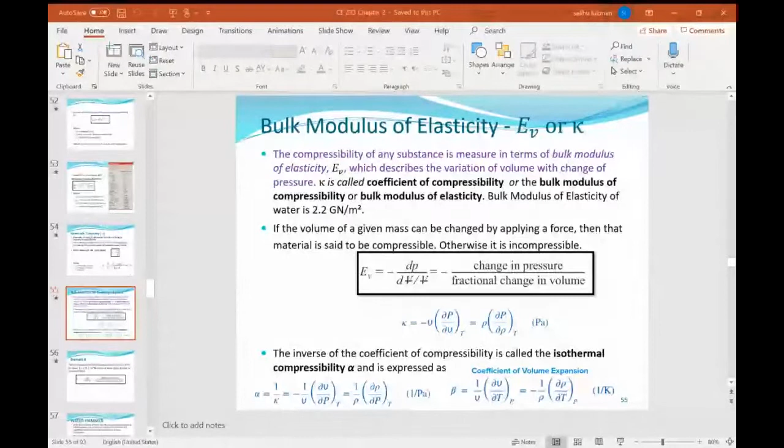We'll stop at... how many questions for the quiz? Not many, maybe just around 2. And it is fill-in. The question is fill-in, which means you are going to solve the problem, then scan and upload on the blackboard. Okay, then we want more minutes, not only 10 minutes. Yeah, that's why it's 15 minutes. So 10 minutes for solving the problem and 5 minutes just to scan and upload back to blackboard.

So altogether it's timed at 15 minutes. I wish you'd increase it because it's the first quiz and this content is fluid mechanics, so we don't know how long it will take. I wish you increase the time. It is going to be simple, the time is enough, just wait and see the question first. Yes, but you know it is the first quiz in this course, fluid mechanics, so we don't know how long it will take from us.

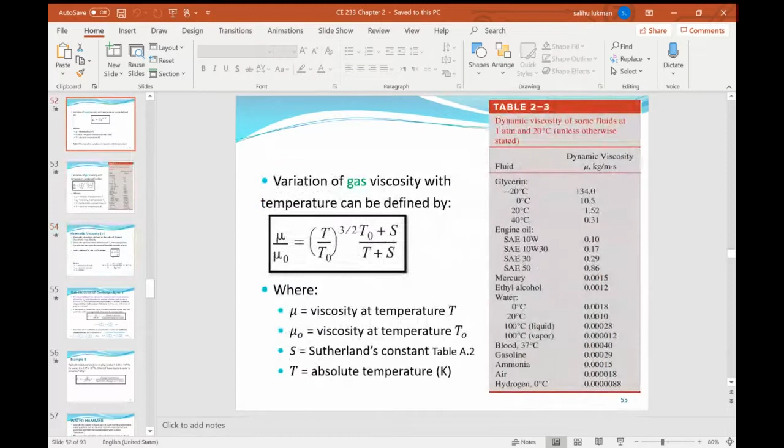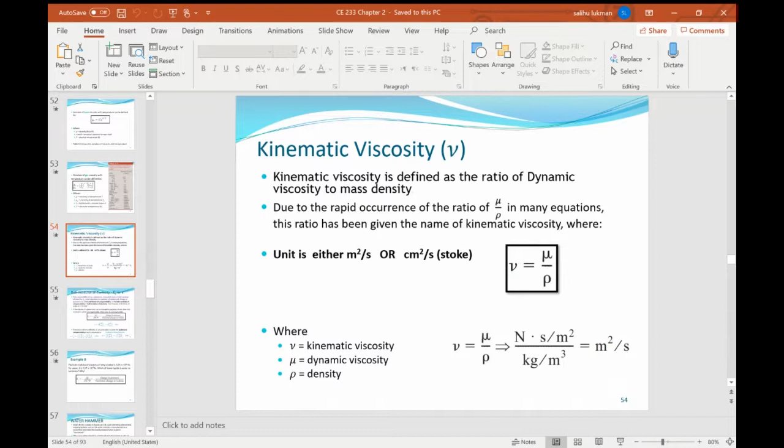So let's continue. If you remember, in our previous class we discussed viscosity, which is the ease with which liquid flows, or the resistance of fluid to shear deformation. This, we said, is synonymous with friction in solids. In liquid or fluid, we call it viscosity.

Now we will look at another property: bulk modulus of elasticity. The symbol for it is E subscript V, or kappa. Kappa, that is not K, but it's called kappa, okay. Which is like a measure of the compressibility of a substance, how easily the substance is compressible.

When we talk about liquids and gases, we have been talking about their compressibility, how the volume can change. The compressibility of any substance is measured in terms of bulk modulus of elasticity, which describes the variation of volume with change of pressure. That is, when you apply pressure, how does it change?

The bulk modulus, kappa, is called coefficient of compressibility, or the bulk modulus of compressibility, or the bulk modulus of elasticity. We have Young's modulus in physics for solids, whereby stress is proportional to strain, stress versus strain, so the coefficient there is Young's modulus. Here we call it bulk modulus of elasticity, because it behaves as if the fluid is elastic, meaning you can pull it.

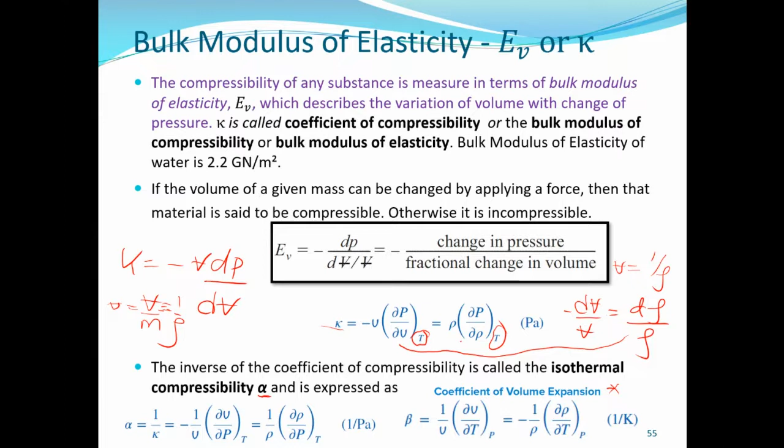So we need to understand all three: the coefficient of compressibility kappa or EV, the compressibility which is the inverse of kappa, and the coefficient of volume expansion or volume expansivity, beta. Alpha is 1 over kappa, meaning for an incompressible fluid, alpha is very small because the change in volume is very small despite the change in pressure. While for an incompressible fluid, kappa is extremely high, since you have dV at the denominator, and the change in volume is very small despite the huge change in pressure that may occur.

Now, just a few examples here to demonstrate the application of the formula. Here you have the bulk modulus. We are to find the bulk modulus of elasticity of ethyl alcohol, provided as 1.06 times 10 to the power of 9 Pascal. For water, it is 2.15 times 10 to the power of 9 Pascal. Which of these fluids is easier to compress, and why?

So who can tell me? You have ethyl alcohol and water. Their bulk modulus of elasticity has been provided. So which of these, based on the bulk modulus of elasticity, is easier to compress? And tell me why. Yes, you can talk, your audio has been enabled. Just talk to me. Just look at the values and tell me, no need to do any calculation here, please.

Okay. Yes. Gentlemen, ya shabab, are you there? We are with you, doctor. Yes, yeah, now tell me. Some are writing, let me check what you are writing.

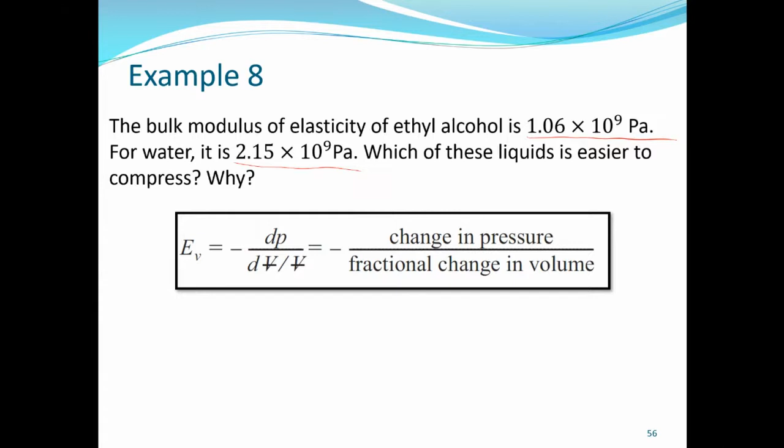We are just talking about pressure, change in pressure, incompressibility of water. We still have in our system where sometimes the density of water could change. We said water is incompressible because its density does not change. But when water flows in a pipe, sometimes due to some sudden change, or when a valve is suddenly closed, water is compressed, locally compressed, such as sudden closing of a valve. So it is locally compressed, and when it is compressed, it means its pressure could drop, could reduce, and when the pressure reduces, it makes huge sounds, and that is called the water hammer, as if hammering the pipe.

That's why it is called water hammer. A hammer is something used to hit a nail or something, so imagine yourself hitting a pipe, gang, gang, gang, it will be making some sound. So small density changes in liquids can still cause interesting phenomena in piping systems, such as water hammer, which is characterized by a sound that resembles a pipe being hammered. This occurs when a liquid piping network encounters an abrupt flow restriction, abrupt meaning sudden, such as a sharp bend, or suddenly closing a valve, and the fluid is locally compressed.

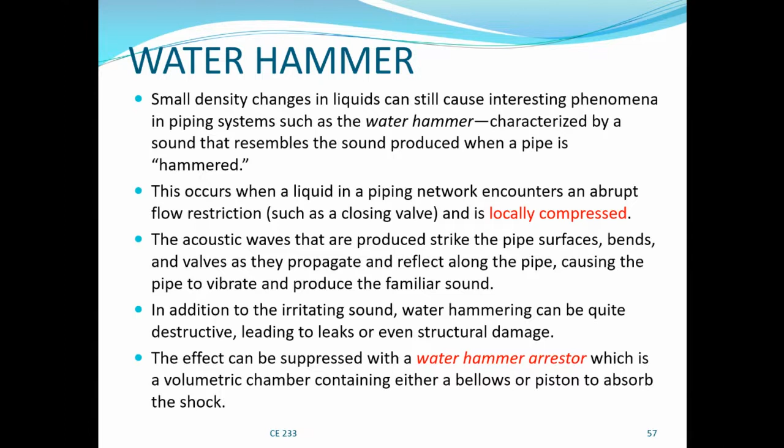The effect can be suppressed with a water hammer arrestor, which is a volumetric chamber containing either a bellows or piston to absorb the shock. So you can reduce the water hammer by using a water hammer arrestor. Wherever you feel water hammer can occur, you can install a water hammer arrestor to absorb shock. Otherwise, if the shock is not absorbed, it can cause structural damage and can lead to leaks.

Now, water hammer - this is an example. This is a tower, a large surge tower built to protect the pipeline against water hammer. This is built for penstocks. Penstocks are large diameter pipes, let's say, for power generation. They are large diameter pipes.

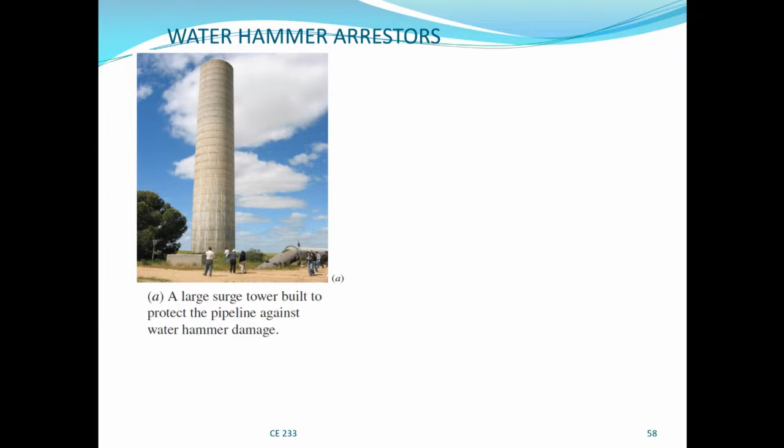Water hammer can lead to structural damage, and we don't want structural damage in our hydro power stations. So this tower has liquid, water, inside which is open to the atmosphere. It absorbs the water hammer shock. So for large pipes that carry liquid, this is called a surge tower, and it has a free air surface.

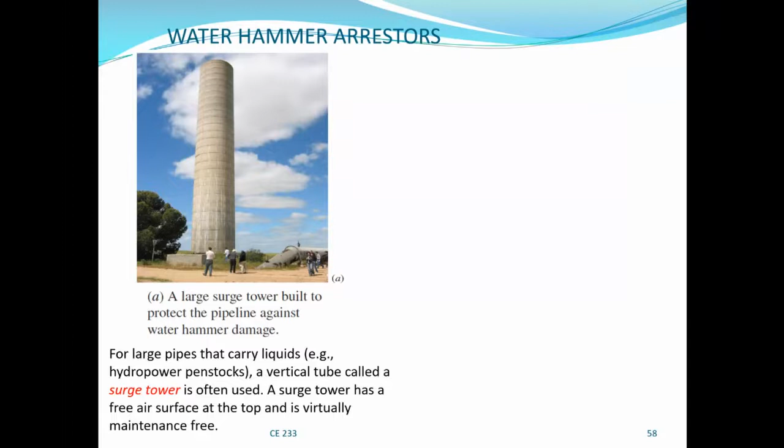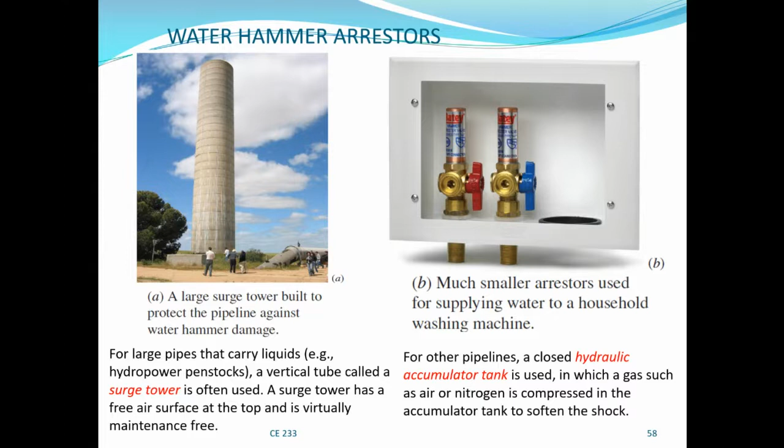Then this is another one, much smaller, arrestors used for supplying water to a household washing machine. This contains what's called a closed hydraulic accumulator tank, which has a gas, in the form of compressed air or nitrogen, that is used to soften the shock. So this is for a small pipeline, and this is for a very large diameter pipeline called penstocks.

Now, here's an example of the bulk modulus of elasticity. We have a pressure applied of 2.15 times 10 to the power of 6 Pascal to a mass of water that initially filled a 2,000 centimeter cube volume. Estimate its volume after the pressure is applied. So we want to find the final volume here.

This is the applied pressure, and this is our initial volume, and we want to find the final volume. So V1 is 2,000, and we want to find V2. And we have our dP, the applied pressure. This is water, right, so we know the coefficient of compressibility of water.

So all we need to do is find dV. And dV in this case is negative, because the pressure is inversely proportional to the change in volume, meaning when the pressure increases, the volume decreases. That's why we put the negative sign, so the bulk modulus will turn out to be positive. Is that clear? Because dP and dV are inversely related - when pressure increases, volume decreases, and when pressure decreases, volume increases. So this term dP/dV will turn out negative, and we put the negative sign to make the bulk modulus of elasticity a positive value.

Okay, so this is just going to be V1 is 2000 and dV is minus 2. So this is 1998. This is the change in the new volume, centimeter cube. This is the new volume when you apply that pressure. You see the volume has slightly decreased, slightly. Is it clear?

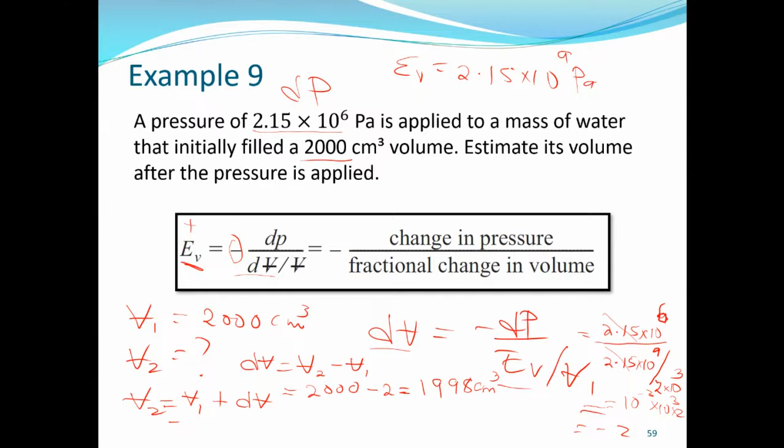Yo, Shabab, is it clear?

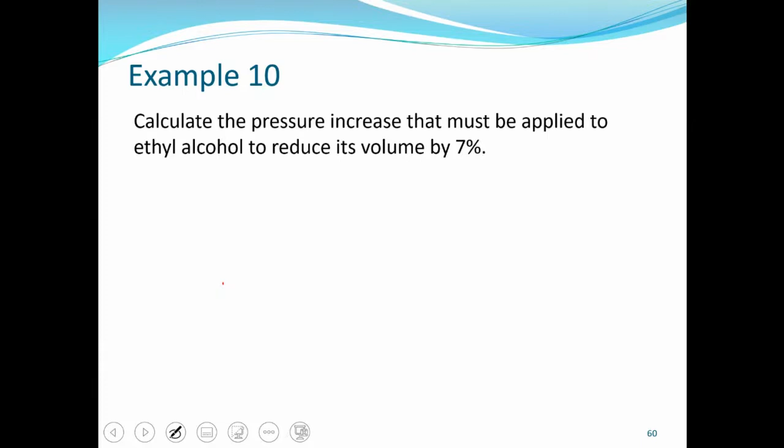Now this one is saying calculate the pressure increase that must be applied to ethyl alcohol to reduce its volume by 7%. This 7% is now the fractional change in volume. So what is the pressure that must be applied? Very simple, straightforward, and direct. This is already given. We want to find the pressure to be applied.

So this dP, the pressure, is now going to be E times dV divided by V, okay, correct? E is 1.06 times 10 to the power of 9, and then the change in volume, which is negative definitely, is going to be minus, because it's a reduction, because V2 is less than V1, so definitely it's going to be minus, is 0.01... 0.07 times 1.06 exponential 9, so the pressure, the change in pressure that will produce this change in volume is now 7.42 times 10 to the power of 7 Pascal. Okay, very simple.

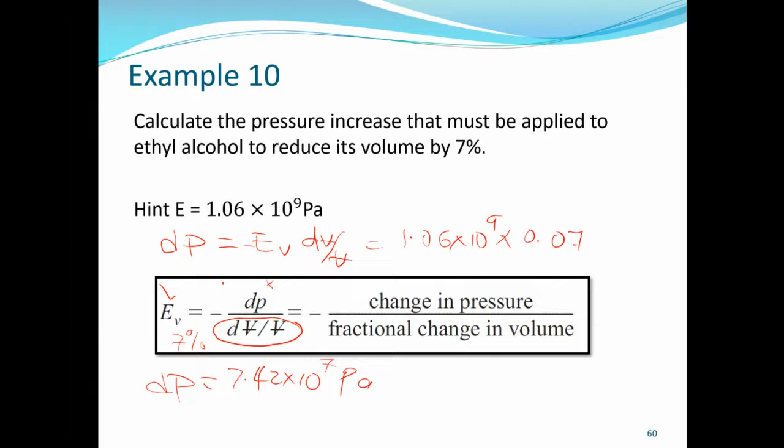Now that is the bulk modulus or the compressibility. Now we will look at another interesting property of fluid, or in particular here, this property is specific to liquids. Surface tension, which is, you know, the surface of liquid sometimes behaves as if it were in tension, meaning it is being pulled from the inside. So liquid possesses the properties of cohesion and adhesion due to molecular attraction. This you must have done in physics. Cohesion force and adhesion force. When you have molecules of the same substance, let's say water, the force of attraction between the molecules is called cohesion force, or cohesion. Is that clear? They are attracted by cohesion, or cohesive force.

While when you have molecules of different substances, let's say water and glass, the force of attraction between these two molecules is called adhesion. So depending on which one is heavier, that allows the surface of liquid to behave as if it were an elastic surface. For gases, usually because the molecules are far apart, their cohesive force is very weak. They don't have much intermolecular attraction, but they collide with each other because they are randomly in motion and constantly colliding with each other and with the walls of their containing vessels, so this sort of exerts some kind of interaction among the molecules. But for liquids, whose molecules are closely packed together, very close to each other, you have strong cohesion.

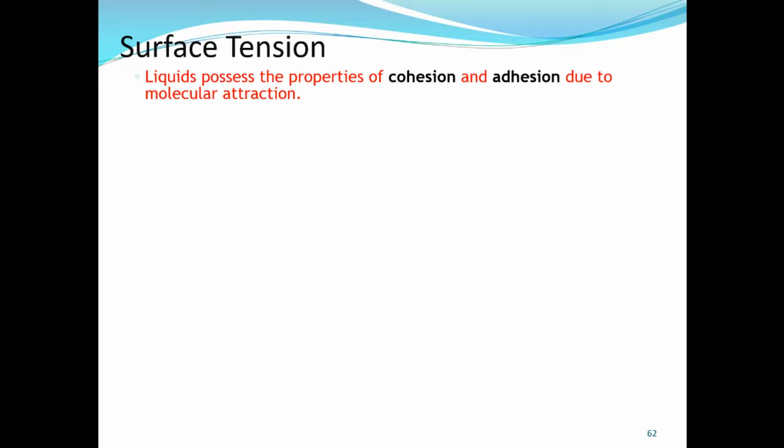Now, due to the property of cohesion, liquid resists small tensile forces at the surface or at the interface between the liquid and air, known as surface tension. The notation we use for designating surface tension is sigma. So these are liquid particles that are attracted by other liquid particles within the liquid, because you have the liquids all over. So this particle is attracted by all particles around it, surrounding it. That is for particles within the water body. But for particles at the surface, they are attracted only by particles within the liquid. They are attracted by particles within the liquid. Above the liquid, they have different particles, which is air. And air, like I said, has less cohesion compared to that of liquid.

So there is less force attracting the liquid particles for those that are at the interface, at the surface. Hence, they are pulled inward by the liquid within itself, deeper down. So they are pulled inward and they behave as if you have a gelatinous surface, behaving as if the surface is under tension. Now, surface tension is defined as the force per unit length, and its unit is Newton per meter because it's force per unit length. And then it can also be defined as the energy required to increase the surface area of a liquid per unit area. Its magnitude typically ranges from 1 to 100 millinewton per meter.

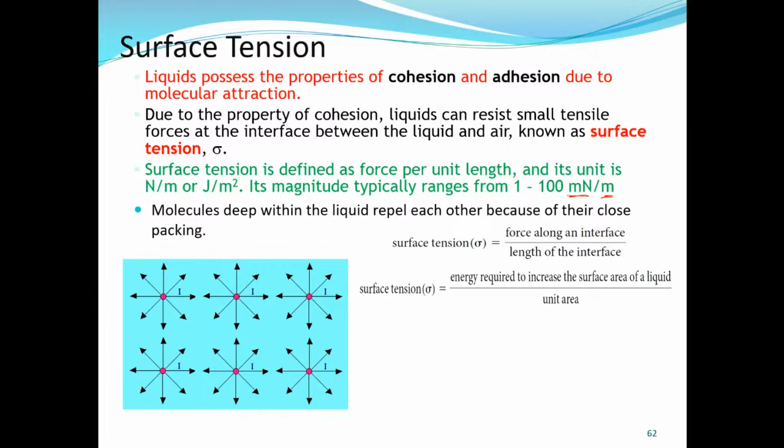Now, examples of surface tension: the value of surface tension, if you look at it, is very small, but it has significant influence. It has a lot of application in our daily lives and a lot of industrial application.

Wicking: water will wick into a paper towel when you have water, use a paper towel, water will be sucked by the paper towel. Ink will wick into paper. And polypropylene, which is an excellent fiber for cold weather aerobic activity, wicks perspiration. Wicks here means it sucks away perspiration, that is sweat, from our body. All this is because of surface tension of water.

And capillary rise: here, a liquid will rise in a small diameter tube. Water will rise in soil. When you have a small diameter tube, up to 1 centimeter, and you put it inside a container of water, it will rise above the water surface in the container, and that is because of surface tension, because the adhesion is greater than the cohesion. The adhesive forces, that is the force between the molecules of water and that of the glass, is stronger than the force holding the water molecules together, that is the cohesion force. So that is why water rises in glass, while for mercury it is the reverse, because the cohesion force is greater than the adhesion force.

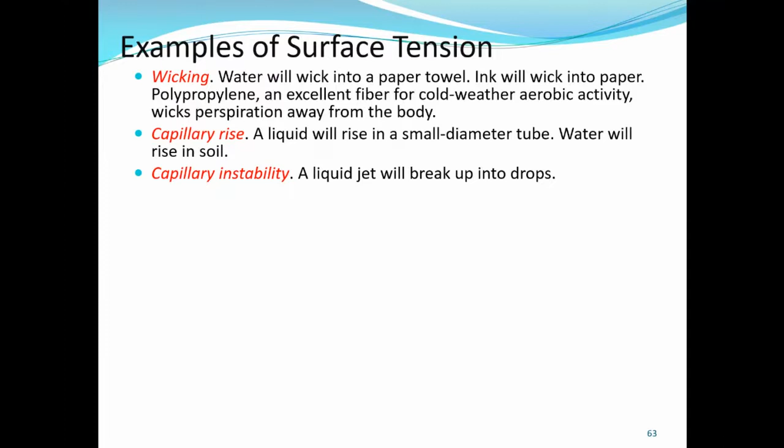And you have capillary instability, where a liquid jet breaks up into drops. When you throw water, it breaks up into liquid drops. And drop and bubble formation: water on a leaf beads up, meaning the drops collect together and form a bigger one. A leaky faucet drips, and bubbles form. All these are due to surface tension.

Excess pressure: the pressure inside a water drop is higher than the ambient pressure. The pressure inside a vapor bubble during boiling is higher than ambient pressure, which is the surrounding pressure. Just imagine a balloon: when you fill it with water or air, the air acts on the sides of the balloon, pushing on the walls from the inside. So the pressure inside is higher than the ambient pressure, which is atmospheric pressure. We will call that pressure later the gauge pressure, which is the pressure above atmospheric pressure.

Walking on water: the water strider is an insect that can walk on water. Similarly, a metal paper clip or a metal needle can be positioned to float through the action of surface tension on the surface of water. You can place a needle gently on water and it will stay, not because the density of the needle is lower than that of water. No, the density of the needle is higher than the density of water, so ordinarily it should sink. But if you gently place it, a pin or a metal paper clip, it will stay and float on water. This is because of the small force, the surface tension of water, which tends to allow the water surface to behave as though it were an elastic surface.

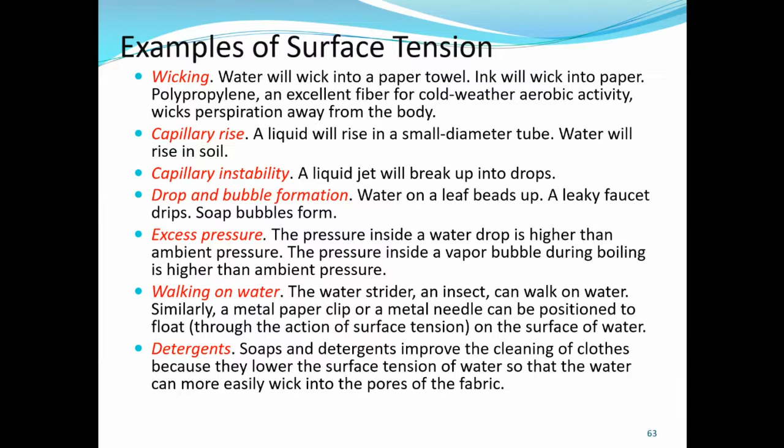So these are different applications of surface tension. Molecules at the surface are less dense and attract each other. Since half of their neighbors are missing, the mechanical effect is that the surface is in tension.

This molecule is deep inside the water, attracted from all sides. This molecule at the surface has no molecule attracting it from above. Of course there's the air molecule, but unfortunately the cohesive forces from air are much weaker, almost absent, because gas molecules are far apart from each other. So there is virtually less attraction from above the surface, while you have huge attraction from the molecules inside the water. That draws the surface molecules down a bit, making it behave as if it were an elastic body.

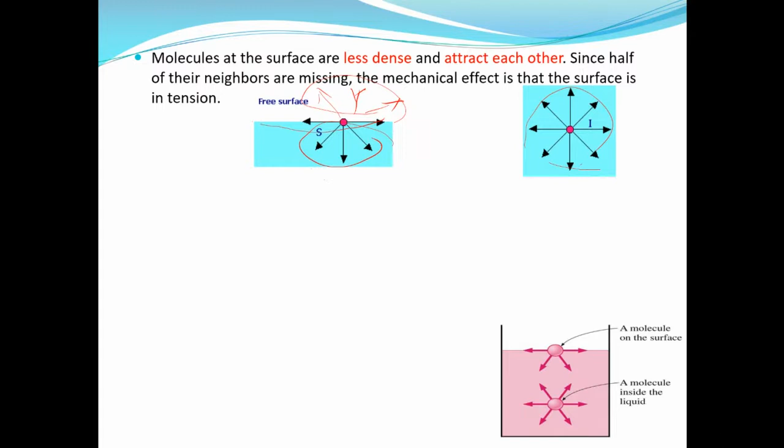So one molecule is deep inside the liquid, and one is on the surface. The one inside is attracted from all sides, while the one on the surface is attracted only by molecules inside the water. This produces the meniscus effect, the curved surface you see at the liquid's edge. Instead of being flat, it sags, pulled toward the water, pulled inward from inside.

A molecule is surrounded by other molecules, and intermolecular forces are symmetrical and in equilibrium - that's figure A, the molecule inside the liquid. For figure B, the molecule at the surface, there is an imbalance of forces, and this leads to the meniscus effect. At the surface, a molecule has force acting only through 180 degrees. This imbalance means the molecules at the surface tend to be drawn together, acting like a very thin membrane under tension because they are pulled by the molecules inside. This causes a slight deformation at the surface of the liquid, called the meniscus effect.

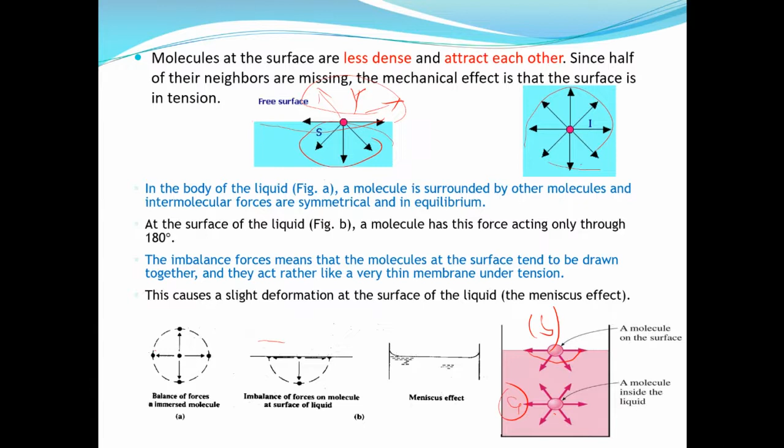Surface tension can be defined as F subscript sigma, the surface tension force, equal to the surface tension coefficient times the length. The surface tension coefficient for water is 0.073, or 73 millinewtons per meter. L is the length of a line that lies along the surface of the liquid, and the surface tension force acts along the surface - it's a surface force.

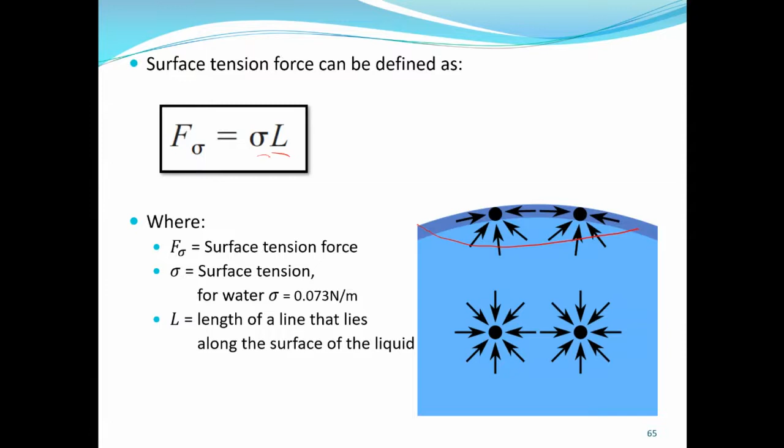This is like in the case of mercury, where you have the upper meniscus - the other one we call the lower meniscus, and this is the upper meniscus. For water it sags, but for mercury it curves upward like this, because mercury has a very high cohesive force.

Some useful facts about surface tension: surface tension of water decreases with temperature. Why? Because when temperature increases, the molecules gain more energy to vibrate and move further apart. Once they're energetic, their random motion increases, and they move more randomly, which effectively reduces the cohesive force, the force of attraction between the molecules.

As such, the molecules move faster, similar to what we mentioned in the case of density - when you increase the temperature, the molecules expand and the cohesive force reduces, the force binding them closely together reduces. They move further apart, which eventually increases the volume when temperature increases, and the density reduces. The cohesive force reduces, and the attraction between molecules within the liquid reduces, which reduces the surface tension.

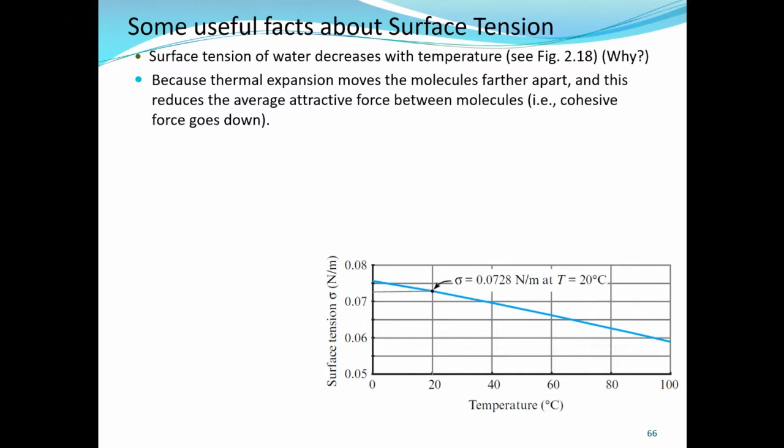Okay, this is at zero temperature, and this is the value from 0 degrees up to 100. So you can see how it reduces the surface tension with temperature, because thermal expansion pushes molecules further apart. This reduces the average attractive force between molecules, so the cohesive force goes down.

Surface tension is strongly affected by the presence of contaminants or impurities. For example, adding soap to water decreases the surface tension. When you add any impurity, it reduces the tension because those impurities go in between the molecules and weaken the cohesive force, effectively reducing surface tension. The reason is that impurities concentrate on the surface.

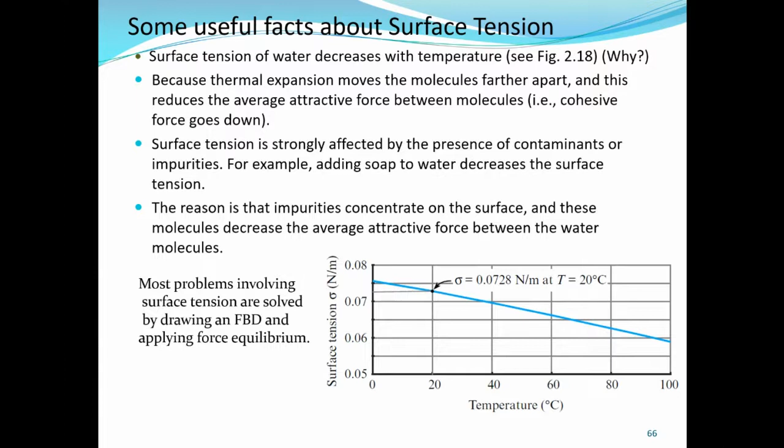Most problems involving surface tension are solved by drawing an FBD, free body diagram, and applying force equilibrium. You took statics, so you know what I mean by a free body diagram, how to sketch it, and how to apply equilibrium equations.

Now here we have a simple example for applying equilibrium to calculate the pressure rise in a water droplet. I mentioned that the pressure inside the water droplet is higher than the ambient pressure, referring to atmospheric pressure if it's in open air. The problem states that the pressure inside a water drop is higher than the pressure of the surroundings. Derive a formula for this pressure rise.

Then calculate the pressure rise for a 2 millimeter diameter water drop, using a surface tension of water of 73 millinewton per meter. So here we are to derive the formula for this pressure rise.

How do we do that? We have a water droplet, so we take a section, and when we take a section we reveal the forces acting. Remember, when we take a section, we have to reveal internal forces acting. Pressure inside a water drop is larger than ambient pressure, and we're given the diameter and the surface tension, so we use Pi to designate the pressure inside the water drop.

When we take a section, we show the forces acting: you have pressure force FP acting, and you have the surface tension at the sides, at the surface, acting at the circumference of the water drop. The pressure force acts in the opposite direction. So here we apply force equilibrium: the force due to pressure equals the force due to the surface tension.

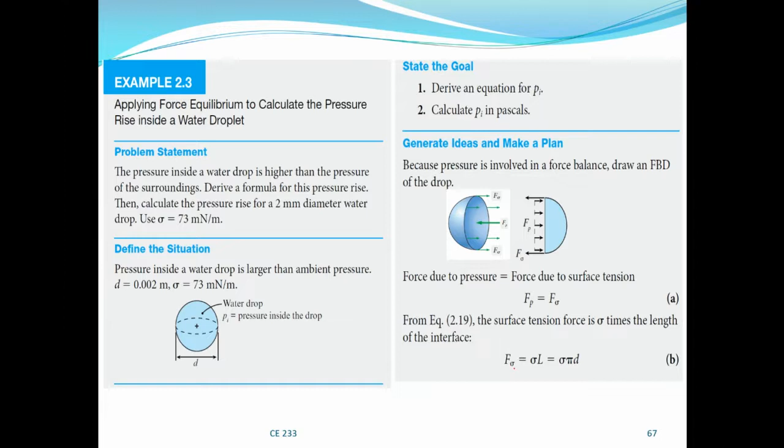So what is the force due to surface tension? Sigma times L. What is L? The length of the circular path, which is the circumference, which is pi d. That's why you have sigma L, where L is pi d, the circumference of a circle. Very simple.

And then what about the pressure force? The pressure force is the pressure times the area, because pressure is force divided by area. And what is the area? The area of a circle is pi d squared over 4, or pi r squared if we're using the radius.

So we now equate the two and make P the subject of the formula. The pressure inside the water droplet is 4 sigma over D. Now we know sigma is 0.073, we know D is 2 millimeters, so we substitute and find the pressure, which is 146.

Gauge pressure means it's above atmospheric pressure. In chapter 3, we will explain all this. Gauge pressure is the pressure above atmospheric pressure, meaning if we want to find the absolute pressure, we add atmospheric pressure. So the absolute pressure, P absolute, is P gauge plus atmospheric pressure. So you see, gauge is the pressure above atmospheric pressure.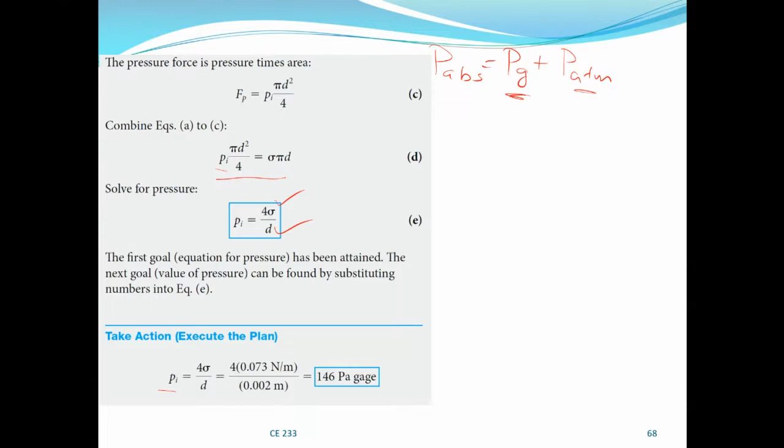So this is in Pascal gauge. Although the pressure is very small because atmospheric pressure is 101.3 kilopascal, and this is just 146, in kilopascal that's like 0.146 kilopascal. So very small compared to atmospheric pressure, but it is higher. The pressure inside the water droplet is higher than atmospheric pressure, above atmospheric.

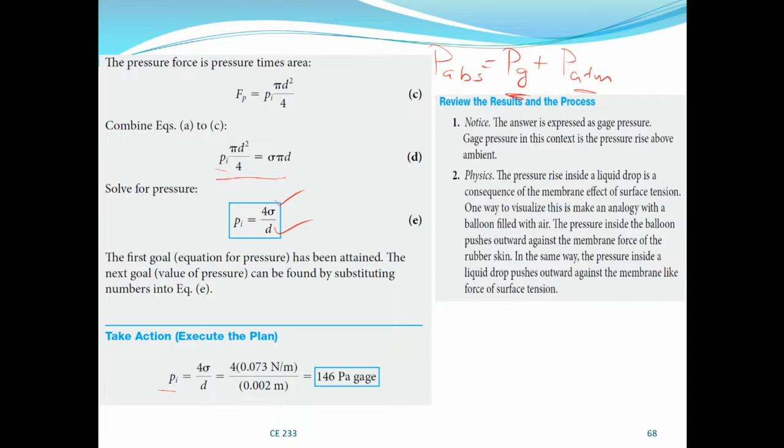Now notice the answer is expressed in gauge, and the rise - I also explained the physics behind why the pressure inside the liquid drop is increased, because of the membrane effect of surface tension. Just imagine a balloon: the pressure inside the balloon pushes outward against the membrane force of the rubber skin. In the same way, the pressure inside a liquid drop pushes outward against the membrane-like force of surface tension. Is it clear?

Now, wetting action of water. How does water wet a surface like glass? The strength of the capillary effect is quantified by contact angle, theta, which is defined as the angle that the tangent to the liquid surface makes with the solid surface at the point of contact. This is called the contact angle. If this angle is acute, less than 90, the liquid will wet that surface. If it is obtuse, greater than 90, it will not wet that surface. Water wets glass because adhesion is greater than cohesion. Wetting is associated with a contact angle of less than 90.

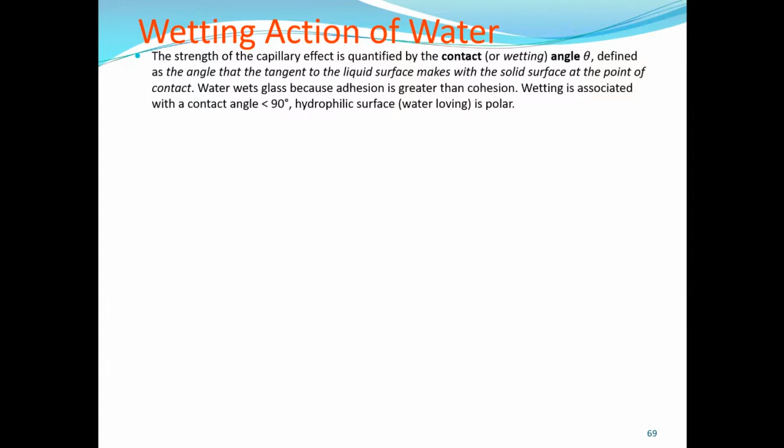A hydrophilic surface is polar. Hydrophilic means water loving, so a hydrophilic surface is polar, meaning it is attracted to water, just as liquids can be polar or non-polar. Polar liquids are miscible with water, while non-polar liquids do not mix with water, like gasoline or kerosene. They don't mix with water, so they are called non-polar.

So this is an example: when you put a tiny drop of water on a glass surface, it will appear this way. We said the contact angle is the angle that the tangent to the liquid surface makes with the solid surface. This is the liquid surface, and the tangent makes an angle with the solid surface here. So this angle theta is the contact angle, and you can see this angle is less than 90.

Adhesion in this case, between dissimilar materials water and glass, is stronger than cohesion. The adhesive forces are stronger than the cohesive forces, so the adhesive force pulls the water outward. Here you have a weaker cohesive force, and this is why water wets glass and produces the lower meniscus. It pulls down, and this is the contact angle, theta or phi, in the case when water is in a particular container.

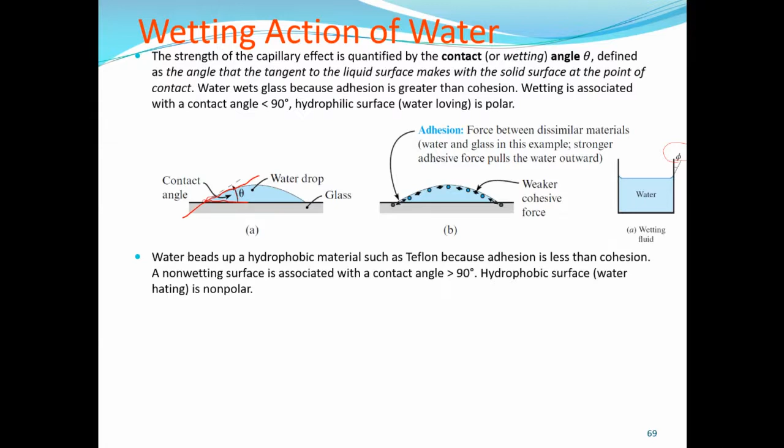Now water beads up on a hydrophobic material such as Teflon, because adhesion is less than cohesion in this case. How does it appear? It appears like this, with the contact angle greater than 90. This can be water on Teflon, because Teflon is non-polar, or hydrophobic. The surface is a hydrophobic surface, so it will not appear like glass. Theta is greater than 90, and here cohesion is greater than adhesion.

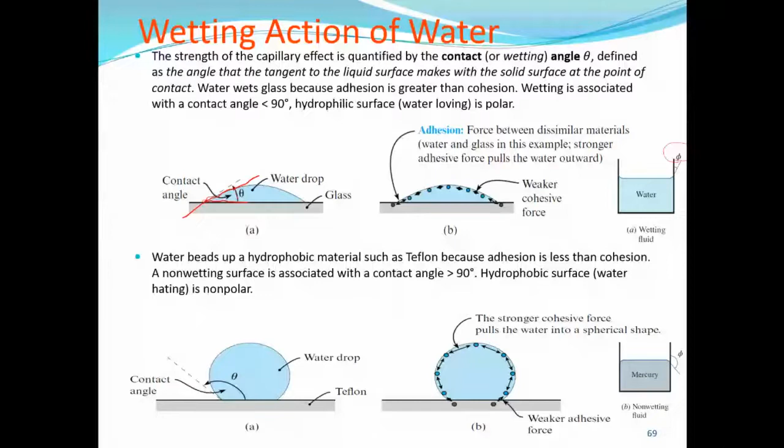So you have a stronger cohesive force that pulls the water into a spherical shape, together, and a weaker adhesive force in this case. This is also the case with mercury. That's why water is called the wetting fluid in the first case, because it wets the glass. In the second case, it is a non-wetting fluid because it does not wet the surface - it can be mercury and glass, water on Teflon, and other non-wetting cases.

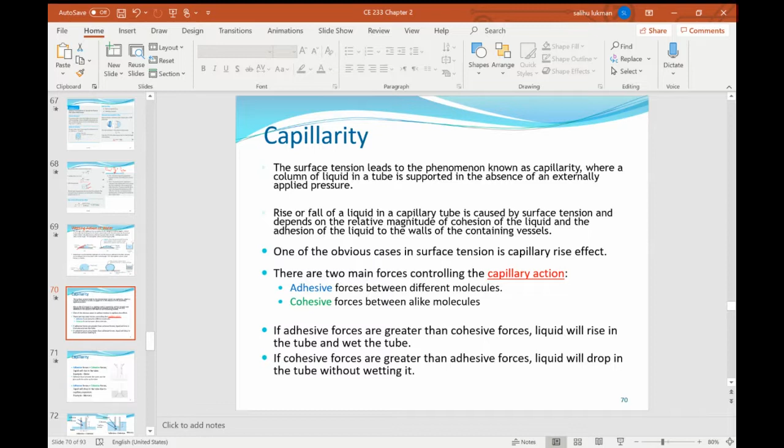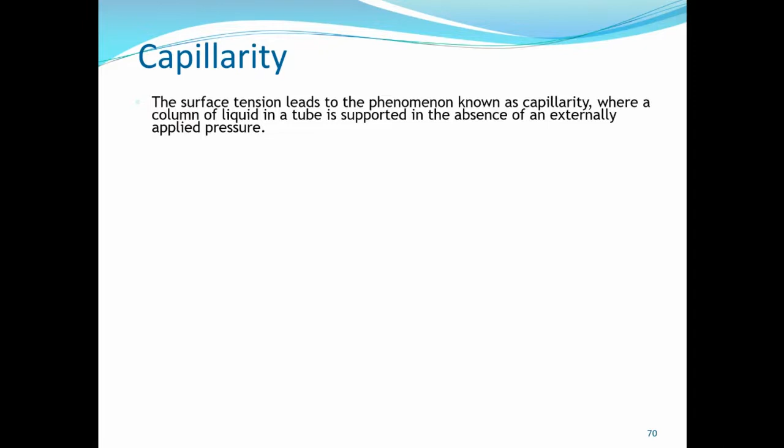With capillarity, that is the rise of water in a small diameter tube - that is capillarity. Surface tension leads to the phenomenon known as capillarity, where a column of liquid in a tube is supported in the absence of an externally applied pressure. This happens because of the surface tension of water. The rise or fall of a liquid in a capillary tube is caused by surface tension and depends on the relative magnitude of cohesion of the liquid and the adhesion of the liquid to the walls of the containing vessel.

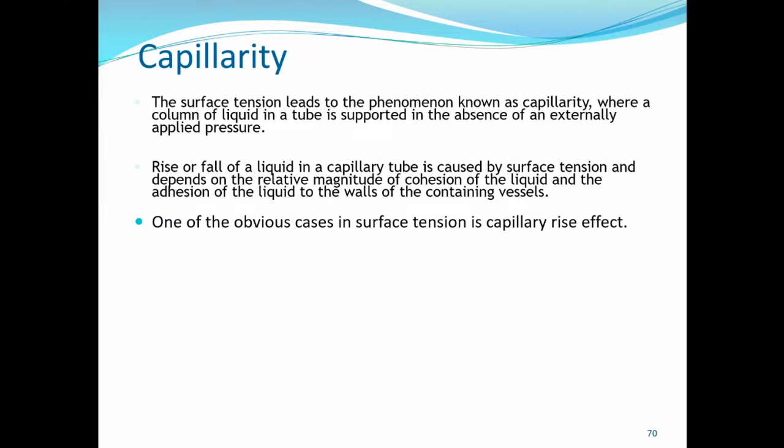One of the obvious cases of surface tension is capillary rise. You have capillary rise when water rises in a capillary tube, and capillary fall when a liquid falls in the capillary tube. In this case, it will be a different one, which is mercury. We will explain all this.

There are two main forces controlling capillary action: adhesive forces between different molecules and cohesive forces between alike molecules. If adhesive forces are greater than the cohesive forces, liquid will rise, just like when adhesive forces are greater than cohesive forces, liquid wets glass or a particular surface.

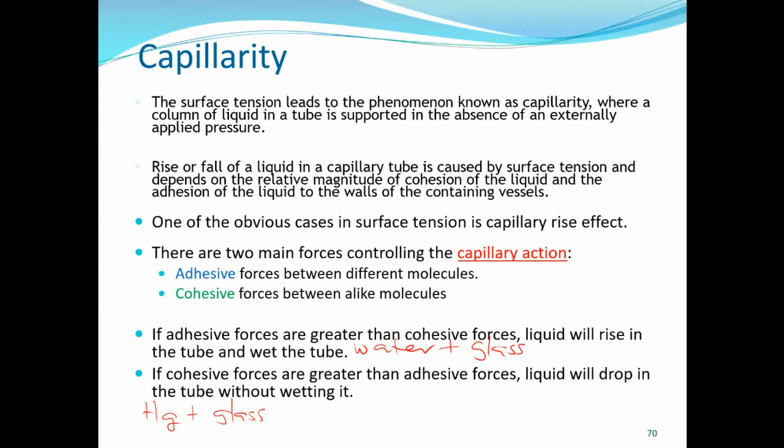So here liquid will rise and wet the tube. If cohesive forces are greater than adhesive forces, liquid will drop in the tube without wetting it, like in the case of mercury and glass, the second case. This is the case of water and glass, because water wets glass capillary tube. And this is the case of mercury and glass capillary tube, because mercury doesn't wet glass, and that is capillary fall.

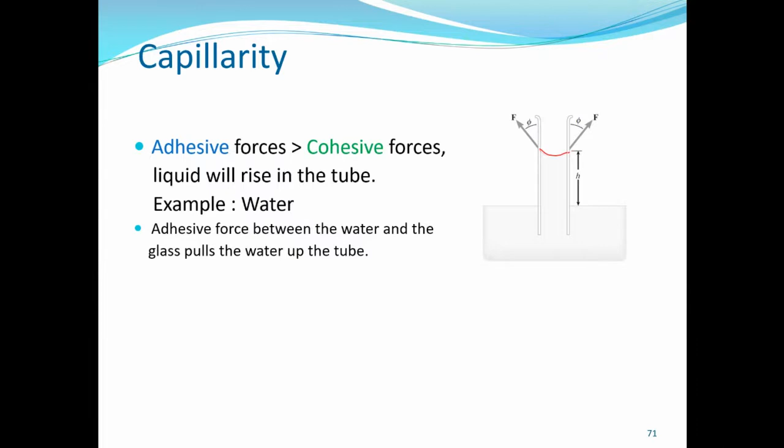Now, adhesive forces greater than cohesive forces, liquid will rise, like in this case, you can see this is the level of liquid in the container. This is small diameter, up to about 1 centimeter, it will rise, because the smaller the diameter, the higher we are going to see that relationship. And this is the surface tension force acting along the surface, and this is the contact angle between the surface and the solid boundary. So adhesive force between the water and the glass pulls the water up the tube.

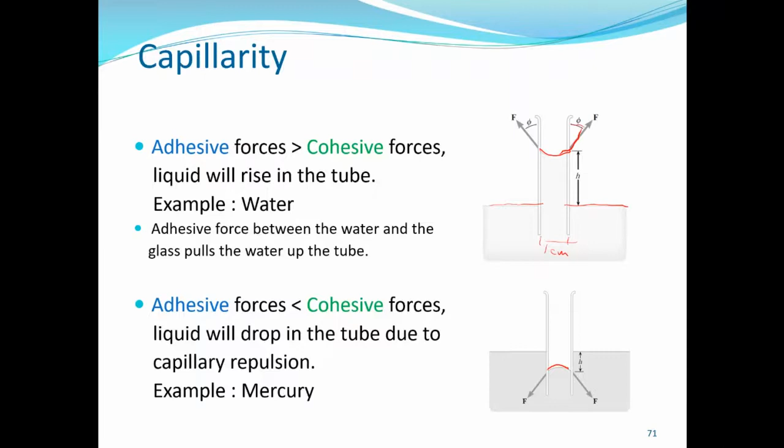For adhesive forces less than cohesive forces, you have liquid drop in the tube due to capillary repulsion, not capillary attraction, in this case, capillary repulsion. Example, mercury and glass. This is mercury, its level you can see is lower than the level. So this is H, this is H. We will see how to determine H, whether capillary rise or capillary fall.

So, still explaining: the pull of surface tension lifts the column, surface tension lifts the column. What about mercury? It pulls it down, or it pushes it down, because in this case you have adhesion less than cohesion, meaning cohesion is greater than adhesion.

So how can we determine the height of water in the capillary tube? We apply the equilibrium equation, because it is the surface tension force that is pulling this weight of liquid. So this weight W is being pulled by the surface tension force acting along this. So we resolve the force and then balance it with the weight. The weight in the capillary tube is balanced by the surface tension force. So the vertical component of the force in the z direction is balanced by the weight, and then we substitute to find H, or delta H.

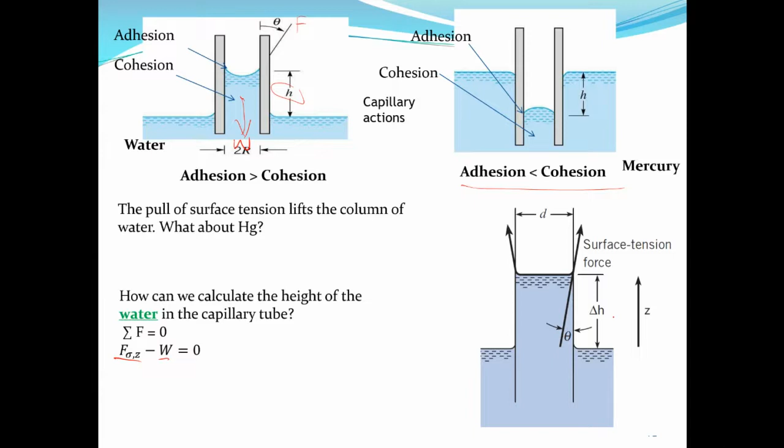Let's do that. So here we get our system. Our system is the weight of liquid in the capillary tube, so this is the weight. Weight is mg, isn't it? Mass is what? Density times volume. Density times volume, times g. And rho g is what? Specific weight. Rho g is specific weight, times the volume. And what is the volume?

This is cylindrical, so the volume will be the cross-sectional area of the liquid, which is circular, pi d squared over 4, times the area times the height, which is delta H. That's why you have the weight: gamma times the area, pi d squared over 4, times delta H. And the surface tension force is sigma pi d, because it is circular, and then cos theta, the component in the vertical direction, when you resolve the force vertically.

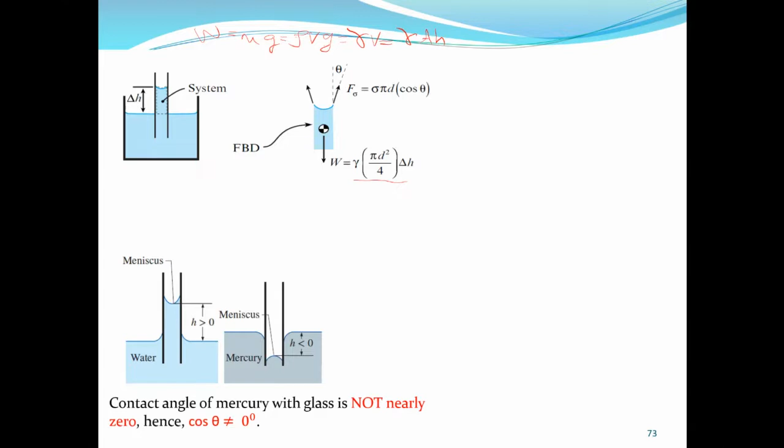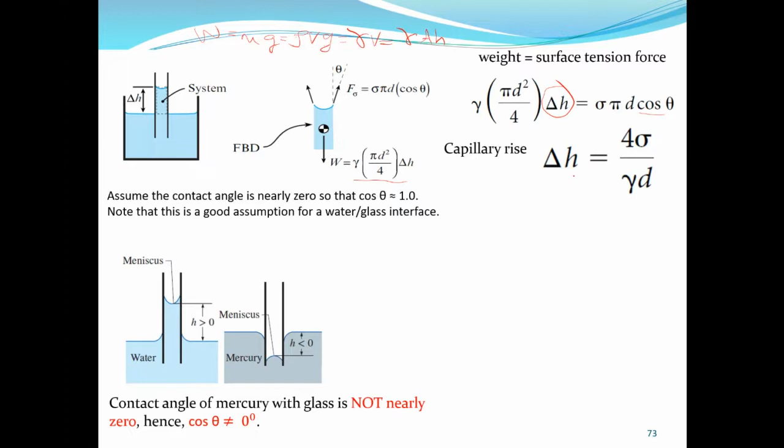So these two forces are equal, weight is balanced by the surface tension force. So here we just make this the formula. But this angle theta is very small for wetting fluids. Assume that the contact angle is nearly zero, and when it is nearly zero, cos theta is approximately equal to 1, because cos 0 is 1. This is a good assumption for the water-glass interface, because the angle is nearly zero, because of the meniscus effect. So here cos theta becomes 1, and delta H or H becomes 4 sigma over gamma d.

Gamma is the specific weight of water, or just the specific weight of the fluid or liquid. So in atmospheric air, the contact angle of water and most other organic liquids with glass is nearly zero, so phi is almost equal to 0, or theta, as the case may be. Note that the contact angle in general is different in different environments, such as another gas or liquid in place of air.

So here is the water-air interface. If you use another gas, the contact angle will change. It depends on the medium, on the gas or liquid. The contact angle changes from one medium to another.

What about capillary fall? This is for capillary rise, H is greater than 0. For capillary fall, it is going to fall, so H is less than 0, because theta is going to be more than 90. So we cannot ignore it, and cos theta is going to be minus.

Note that capillary rise is inversely proportional to the radius. Diameter is twice radius, so the capillary rise is inversely proportional to the radius of the tube, meaning the smaller radius will have higher capillary rise and bigger radius will have less capillary rise.

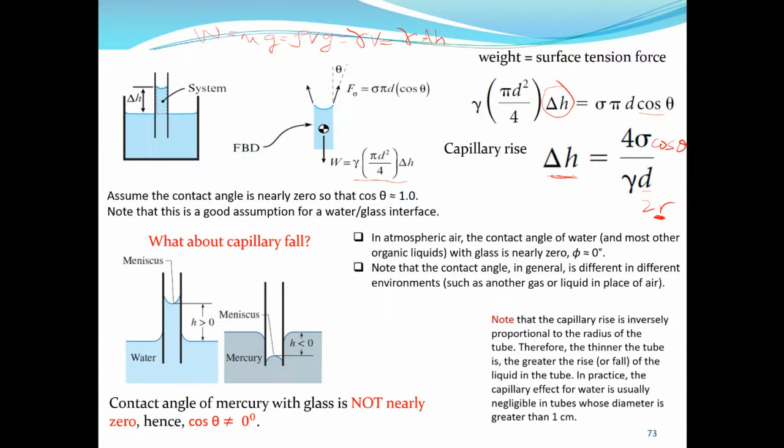Like I said, the contact angle of mercury is not almost 0, hence cos theta is not equal to 0 degrees when you have capillary fall. For capillary fall, it's the same formula, but we have to maintain our cos theta, because cos theta is not equal to 1 when you have capillary fall, since theta will be more than 90 in almost all cases, like 130. Cos of an angle more than 90, you find it to be negative. So that's why you have it as minus. When you have it minus, it means capillary fall.

Now, still on the droplet, the water drop or droplet. We will analyze it. We have analyzed it before, but we will also now make some comparison: half of a droplet or air bubble. You remember we did the surface tension forces acting along the surface, and this is balanced by the pressure force inside.

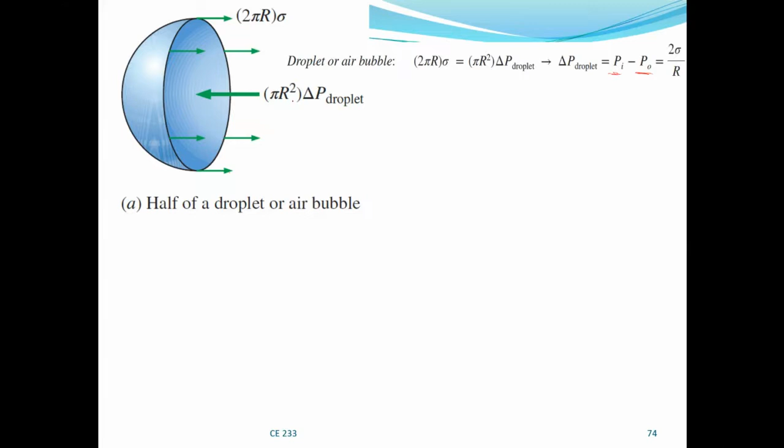Or the change here, we use delta P. Delta P is the pressure inside minus the pressure difference - this is the internal pressure minus the ambient pressure, the surrounding pressure, which is usually atmospheric. So now we balance it out: this is pi r squared, the area of the circle, and this is the circumference of the circle.

You remember surface tension force is sigma L, and in this case L is the circumference of the circle, which is 2 pi r. So the surface tension force is balanced by the pressure force, and the pressure force is the pressure times the area. So this is equal to that.

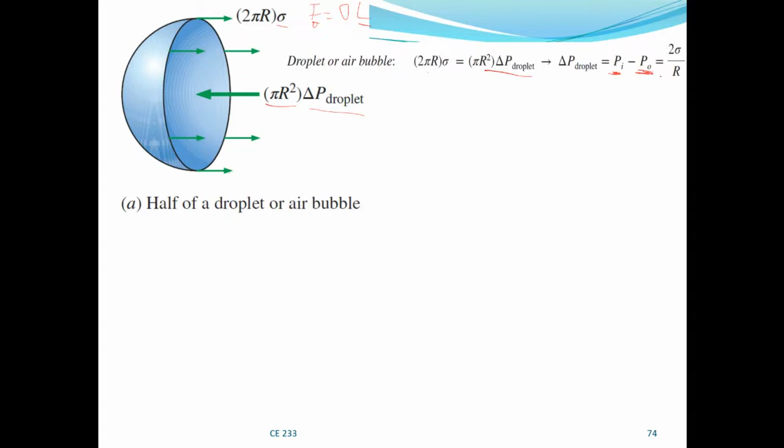Then we make delta P the subject of the formula, which is 2 sigma over R, if we are using R. If we are using D, because R is equal to D over 2, we have 4 sigma over D. So this is now the pressure difference - this is the internal pressure inside the droplet, and P naught is the surrounding pressure, which is atmospheric. If you are using gauge pressure, you just strike this out, because the atmospheric pressure is the reference, which is now 0.

Where Pi and P naught are pressures inside and outside of the droplet or bubble. Again, if it's not atmospheric, if it's another gas whose pressure will be provided, it will not be 0. In that case, you use the pressure given to find the pressure inside the droplet or bubble.

Now, what about if it is a soap bubble, half of a soap bubble? For half of a soap bubble, there is an extra factor of 2 in the force balance, due to the existence of the soap film. There is a soap film with 2 surfaces - you can see the inner surface and the outer surface. While for the droplet, you have just one thin layer, one thin surface.

But for the soap bubble, it is wider. So in that case, you have to have the surface tension acting on the inner surface and the outer one. Here the circumference is going to be doubled, because you have the inner and the outer, while for the water droplet, you have just one thin surface. So in this case, in the force balance also, we now use 2, and it turns out to be 4 sigma over R, instead of 2 sigma over R. So we have to note the difference for a droplet as well as a soap bubble.

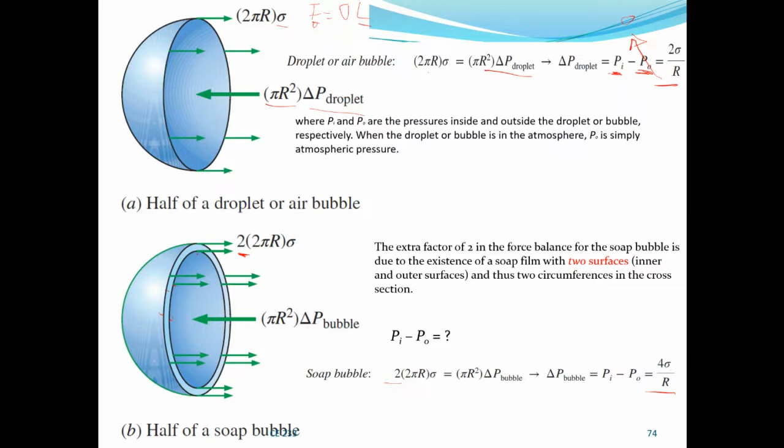Now another example: calculate the capillary rise for water at 20 degrees in a glass tube whose diameter is 1.6. This is the specific weight of water, and this is the surface tension of water. We want to find the capillary rise. Very simple: the formula is 4 sigma over gamma d. We just substitute the values to get this.

If you remember this capillary rise formula, there is cos theta here, which is negligible in this case. But if it were capillary fall, we would have to introduce cos theta, because cos theta is not negligible in that case, since theta is not 0.

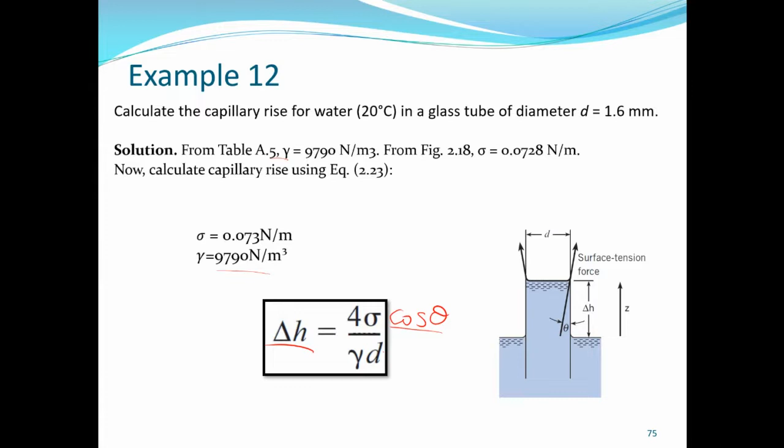Here you just substitute the values, all the parameters are given. Sigma is provided, gamma is provided here, d is also provided: 1.6 millimeter, but you have to convert it to meters, which is 1.6 times 10 to the power of minus 3, and get the height.

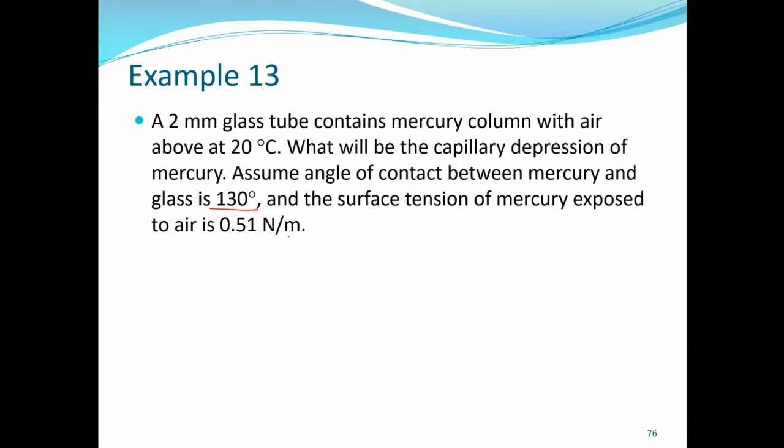Now here it says a 2 millimeter glass tube contains mercury with air above at 20 degrees. What will be the capillary depression? For mercury you have capillary depression, for water you have capillary rise. Assume the contact angle between mercury and glass to be 130 - I told you it's high, 130, more than 90. The surface tension of mercury exposed to air is 0.51 Newton per meter.

So it's the same way, like I said, here you will have a minus sign. We introduce this minus sign so that delta H will become positive at the end, because cos theta at 130 will give us minus. So the minus will take care of this minus sign, and our delta H will turn out to be positive. All the parameters have been provided.

This is the surface tension, which is provided here, and then we have theta, and then this is D, the diameter, 2 millimeter, which we convert to meters, and then we have the specific weight of mercury. Specific weight of mercury is rho g. The density of mercury is 13.6 times 10 to the power of 3, times 9.81. So you get this value, and then when you plug the values here, you will get delta H.

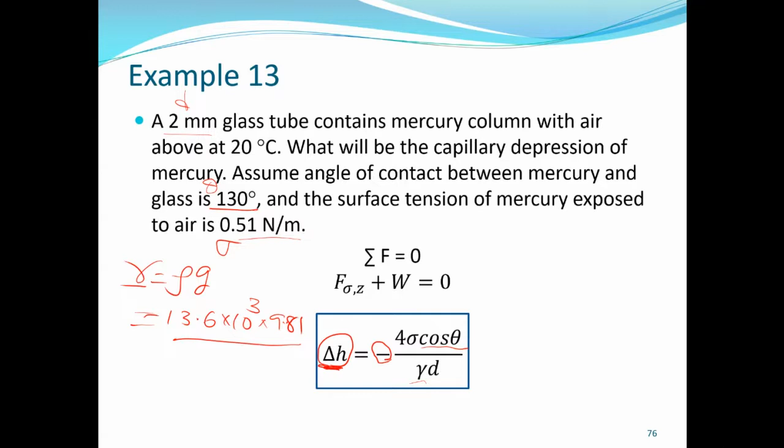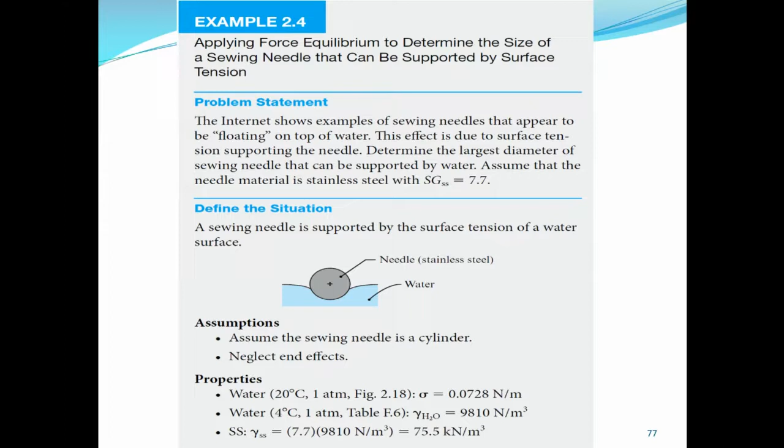So this is like a cross section of the needle. You have water, so it will depress the water surface gently due to the surface tension. Assume the sewing needle is a cylinder and neglect end effects, because the ends are not cylindrical per se, they are tapered in a way.

Assume that it is a cylinder, and then for the water properties you have the surface tension, the specific weight, and this specific gravity. The specific weight of water is provided for the stainless steel - I mean, this is the relative density, specific gravity times the density of water. Which is simply, you remember, rho g - what is gamma of any substance.

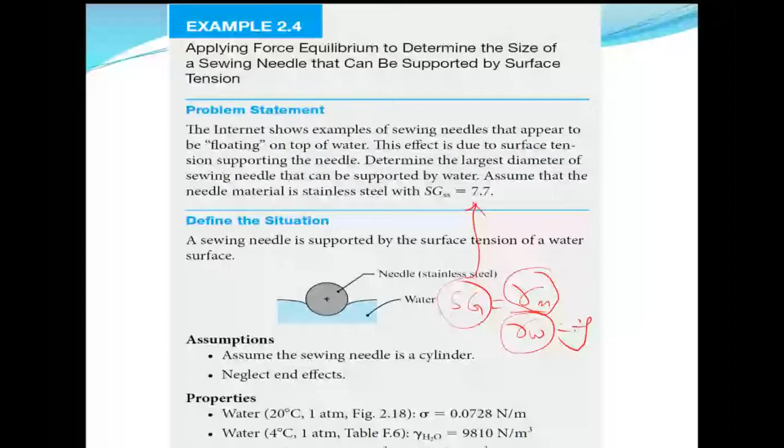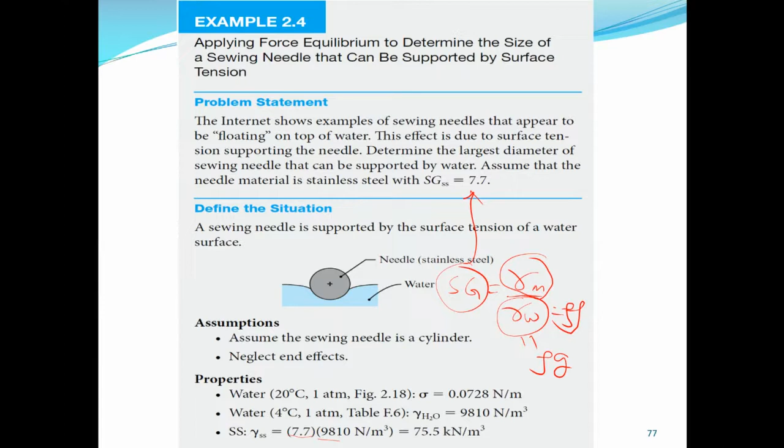Let me say material gamma over gamma of water. So this has been provided here for the needle. For water this is 9810, because it is the density times G, which is 9810, the specific weight of water. So this will enable us to get the specific weight of the needle.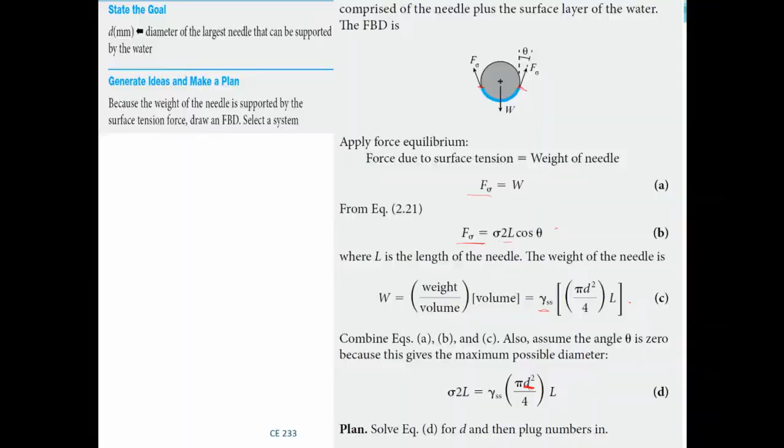So we now equate this weight to be equal to the surface tension force. What do we want to find? We want to find D. So we can make D the subject of the formula, since all other parameters are already provided. Here, D is equal to square root of 8 sigma over pi gamma.

So when you substitute, we have the value to be 1.57 millimeter. When applying specific gravity, look up water properties at the reference temperature of 4 degrees, because at this temperature water has its highest density. Is this clear?

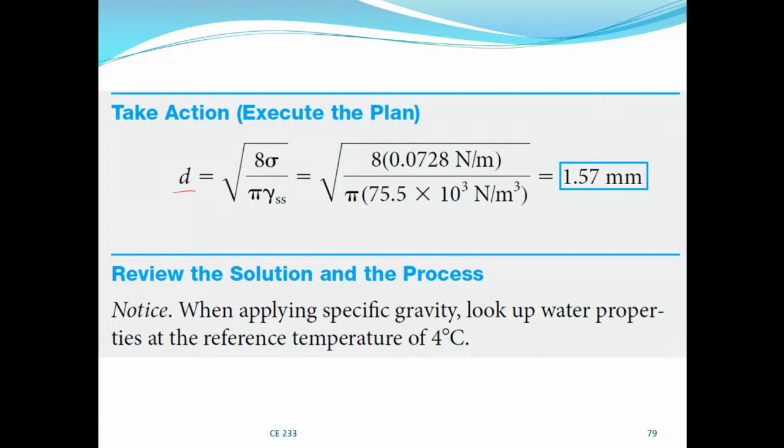Now, vapor pressure. I have started explaining vapor, when liquid changes from liquid to gas, we call it vapor. Although here I will be most concerned about the water vapor, the vapor pressure due to water in particular. But vapor is generally the gaseous form of any material that emanated from its liquid form, or sometimes it can emanate from the solid form when sublimation takes place.

So vapor pressure is the pressure at which liquid vaporizes or boils at a given temperature. When liquid vaporizes or boils, they form bubbles and then vapor comes out, like when you are boiling water. So it's the pressure of the vapor, that's why it's called vapor pressure.

It is the pressure at which the liquid phase and the vapor phase of a material are in thermal equilibrium. Thermal equilibrium here means there is no net flow of thermal energy, meaning they are at the same temperature. It means the liquid and the vapor are all at the same temperature, there is no net flow of energy between them.

As external pressure on water bodies reduces, vapor pressure reduces accordingly, and the boiling point of water as well. When the external pressure reduces, recall the atmospheric pressure, which is the gases surrounding us, pushing on us, thereby exerting pressure on us, called atmospheric pressure.

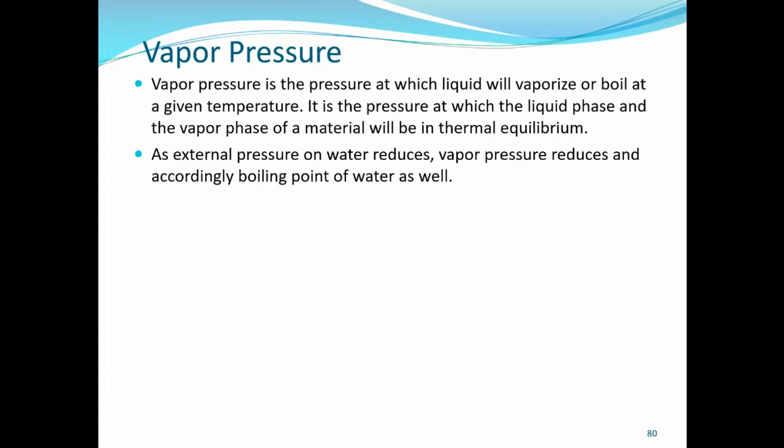The same thing when you have an open liquid, there is atmospheric pressure acting on it. So when you reduce that external pressure on water, the vapor pressure reduces as well, and accordingly the boiling point of water is reduced, because the molecules at the water surface will find it easier to move to the gaseous phase, since there is no pressure pushing on the water surface preventing the molecules from escaping.

So when water molecules find it easier to escape from the surface, the vapor pressure can easily form, and when it forms, it means the liquid can easily boil. So the boiling point of water will reduce, because boiling point is simply the fact that the vapor pressure is equal to atmospheric pressure. A liquid boils when its vapor pressure equals the external atmospheric pressure, or the standard atmospheric pressure.

Like water, it boils at 1 atmosphere. When the vapor pressure, or saturated pressure, which we call the vapor pressure, is equal to the atmospheric pressure, water begins to boil. So when you reduce the atmospheric pressure, water can easily boil at a lower temperature. The same thing when you increase the atmospheric pressure, or the pressure acting on the liquid, it will boil at a higher temperature. This is what happens in a pressure cooker. Because of the pressure acting on the steam, air is expelled, so the steam is contained inside, which exerts pressure on the liquid, thereby increasing its boiling point. So the liquid inside can be held in liquid state at more than 100 degrees Celsius.